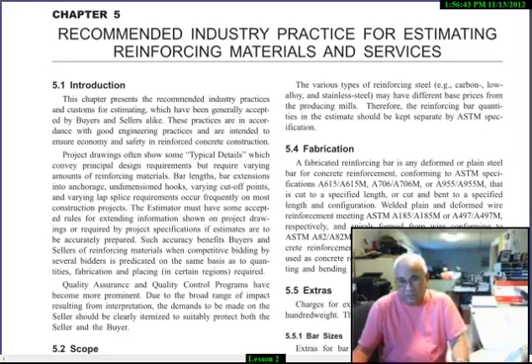In sheared lengths, that is straight bars, the total dimension is rounded up to the nearest inch only. There are no fractions allowed, only full inch. Everything is rounded to the full inch. Fabricating rebar is a costly operation. The cheapest one, of course, will be just strictly shearing of the bar, shearing of straight bars. Straight bars are the cheapest to fabricate.

Mainly, all you do is put a series of bars, several quantity, on a shear machine, shear line, and they're sheared up in one operation. So there's just one operation, shearing. So shearing is the cheapest one. The most expensive is light bending. That's where the name came from, light, which means light in production. Very light in production, because most of the bars that go into that category are all the small bars, the number 3 bars, for example.

In fact, the definition of light bending: all number 3 bars that are bent are light bending. All bars, no matter what size, used for stirrups and ties are light bending. If it's a number 8 bar, used as a stirrup or a tie in a big bridge, that's light bending.

All number 4 through number 18 which are bent at more than 6 points, more than 6 bending points, or in more than 1 plane, 2 planes instead of 1 plane, these are all light bending. Bars bent with more than 1 large radius are light bending. A combination of a large radius and other bends, that's light bending. That's the most expensive one.

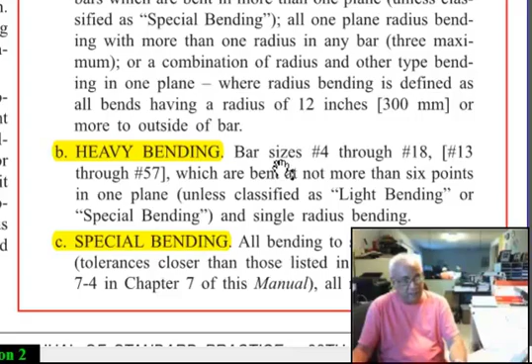On a radial fabrication machine, when you're bending a bar into a radius, there are certain limitations on the fabrication. Bars have a tendency to spring back to their original shape up to a certain radius. For example, the number 3, they say you can bend it to a radius of 5 feet. Greater than 5 feet, you might as well send it straight because it will spring back to straight. So 5 feet radius, a total length of 10 feet.

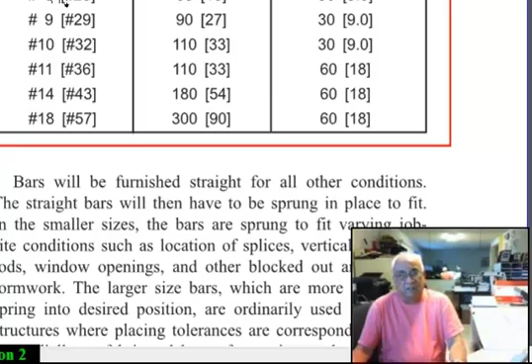And number 8, if the radius is 60 feet, you could bend it. Greater than 60 feet, you might as well send it straight. So this is what this table means. The rebar fabrication table shows the maximum radius and length of bars that will require fabrication. Beyond this table, bars are furnished straight. This is all due to the spring reaction of the bars to radius bending.

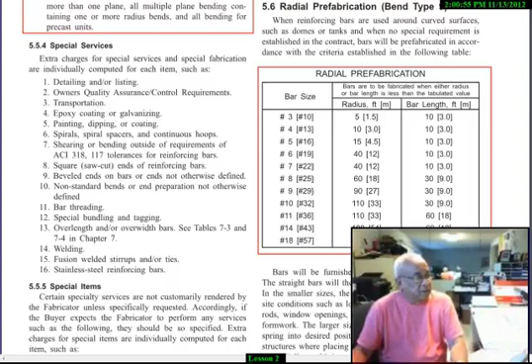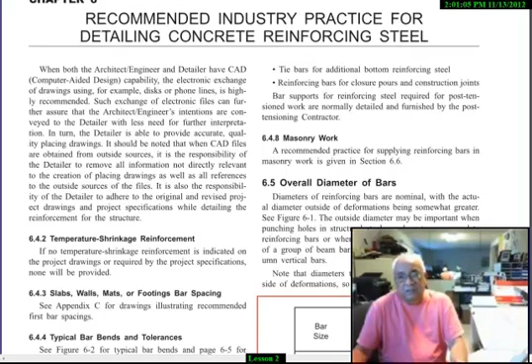Okay, now we jump to chapter 6. In chapter 6, it shows a table that shows the actual diameter of a bar, including its deformation. A detailer needs to do this. You use this in calculating clearances and spacing of bars. If you want to know certain clearances or the spacing of the bars, you use this table to calculate it.

Imperial size bars in the United States are divisible by 8. To know the diameter of the bar, all you have to do is divide it by 8, up to a certain size. For example, number 3 is 3/8 in diameter. 3 divided by 8 is 3/8. Number 4 is ½ inch bar diameter. 4 divided by 8, or ½ inch. 5 is 5/8. 6 is 3/4, because 6/8 is 3/4.

7 is 7/8 diameter. Look at this, the difference. We have number 3 and number 4. 3/8 to ½ inch, only an 1/8 difference. And then another from number 4 to number 5.

That's only an 1/8 difference, 5 to 6. We have a lot of those, so that's why we have more bars, 11 bars against metric. Metric is just 8 bars. So they have a better use of the diameter. In essence, we could eliminate maybe 3 or 4 and just jump to 3, 5, 7 on all that, but this is what we have, and this is what they use.

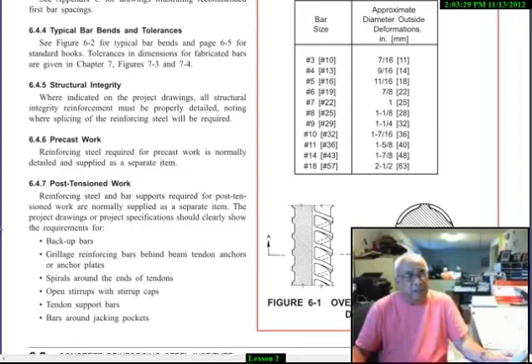You have to refer to your software, the detailing software that you use. You will notice a bar dimension A and G, always A or G. There's A or G. G, always you see A, you see G. A, and then you see G. A, you see G. A or G are standard bend dimensions. They made that specifically

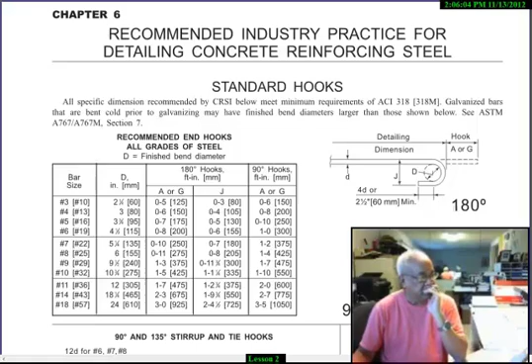Well, luckily, the software company and CRSI ACI already took this into consideration when they put up the standard bend types. So each time you use a type 1 on your computer and it's asking you for the dimensions A, B, or G, you don't need to enter from your memory what A or G is for that particular bar size you're using. All you have to do is hit a key, a designated key. In C97 it's the minus sign. If you hit a minus sign, the computer will come up with the standard A or G dimensions for that particular bar size.

So you don't need to memorize it. Because once you see A or G, you click it. But when you go to B and you click the minus sign, nothing happens because B is not a standard bend. That's any length. So the only standard bend is A or G.

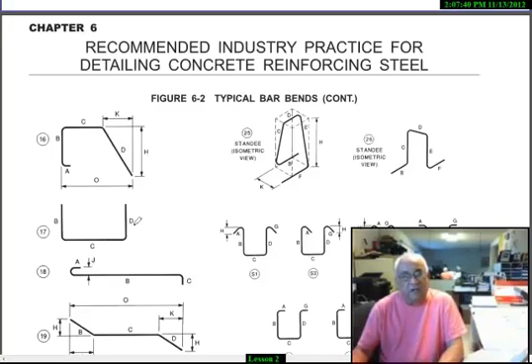And this is the reason why you use a type 2, in this case, which is a U-bar, against a type 17. A type 17 is also a U-bar, but you notice type 17 doesn't have A or G. It's B, C, D. B, C, D is not a standard, which means you have to supply that dimension. Unlike type 2, where all you have to supply is B. A or G, the computer knows. That's why A or G is designated for standard bend.

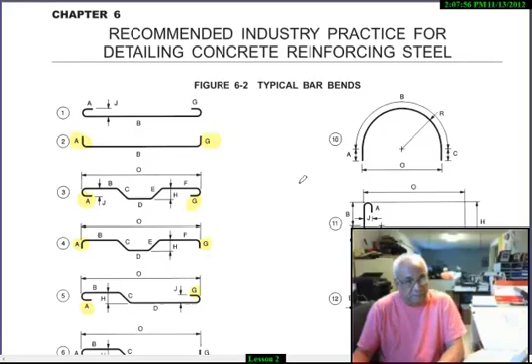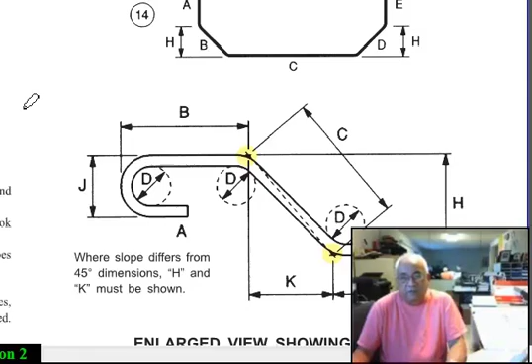The other thing on bar bend types, all the dimensions except the hooks are out to out. For example, look at this. B is out to out, out to out, one corner to the other corner. So outside this, outside that. H is out to out. Everything is out to out. You cannot be center to center. It's always out to out. That's the rule of the jungle in rebar detailing.

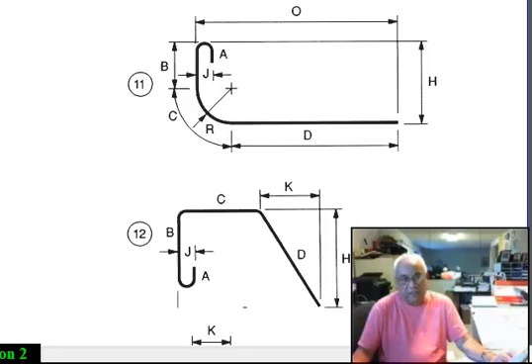H and O are never added, like H and O. They're never added to the length, because H and O are outside, they are external dimensions only and not added to the determined length.

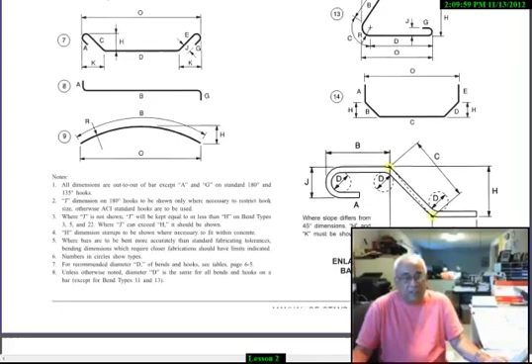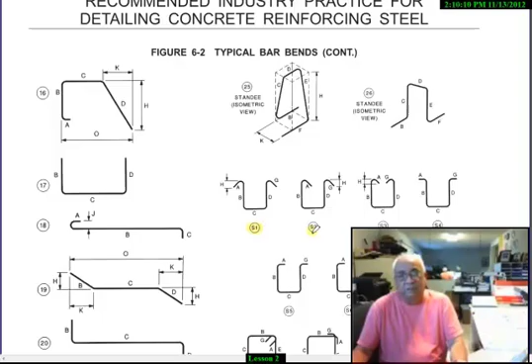Numbered types bend 1, 2, 3, 6 are mostly heavy bent bars, while S and T types, like S1, S2, T, are light bend bars. So by selecting the type, it determines whether the bar is heavy or light, so that when they price the order, they will know what price unit to use. If you use the wrong type, they will be lost in their pricing. They won't know the actual price to use.

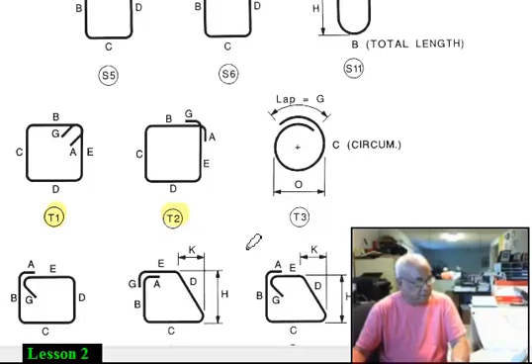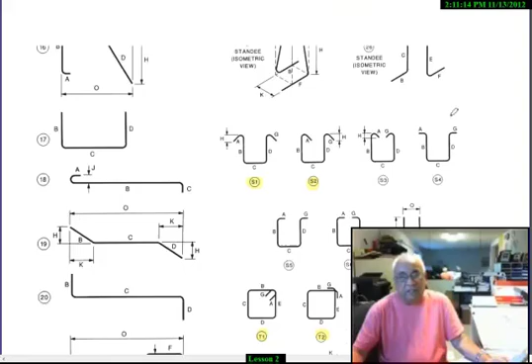Let's see, one example I can show you. Look at S11, it's a U bar. And now let's look at 10, it's also a U bar. Which one are you going to use? If you use 10, then it's a heavy bend bar.

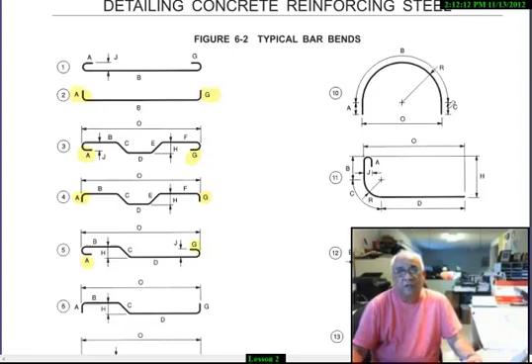The pricing on publication is almost like this: straight bars are priced $5 per hundredweight, or for every 100 pounds they charge $5. Light bending is like $15, three times as much. Heavy bending is only $10. So 5, 15, and 10. So if you have a type that's a U bar and you use type 10, they will price the order as heavy bend. But supposing that U bar is going to be used as a stirrup, like S1, you should have used S1.

That way the weight will be multiplied to a light bending price, which is $15 per hundredweight. See, the wrong use of type will throw off the pricing of the material. So the detailers are obligated to know exactly which type to use, heavy bending or light bending. That's how important it is. It's not just to the estimator, but also to a rebar detailer. And if you're creating your own special type, you have to know whether that special type is heavy or light.

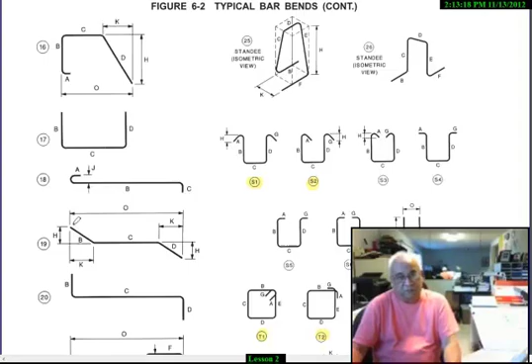The other rule in rebar detailing types is that you don't have to use all the members of the type. For example, if I need a right angle bar with just one right angle, I can use type 17, and I will just enter B and C. No entry on D means it's just an L bar, not a U bar. But if I had an entry on D, then they know. So the rule is you don't need to use all the members.

For example, you could use this for B, C, D only, without the A or G. Like B, C, D. But now you got a problem: you have two types you could use, because all you need is BCD. BCD here, BCD here. In fact, BCD here and here, they're all the same. So in essence, if you only need BCD, you could use type 3, type 4, type 5, or type 6, because all that shape is available in all those types.

But there is a rule. Remember, all these missing dimensions are in the computer. When you task the computer to make the calculation, the more numbers it crunches, the slower it gets. So it behooves you to give the computer the least amount of dimensions to crunch. So if all you need is BCD, choose the type that has the least number of members to delete. For example, between type 3 and type 5 where all you need is BCD, use 5, because there you only have B, C, D and you're just eliminating A or G. Meanwhile on 3 you're eliminating A, and you need E, F, and G.

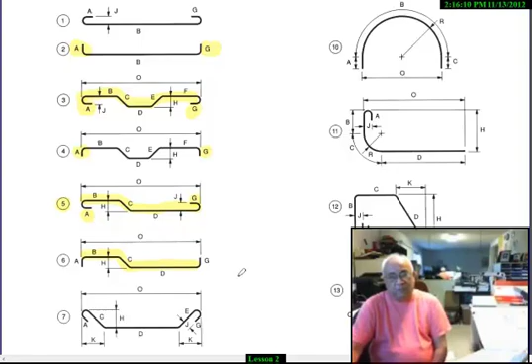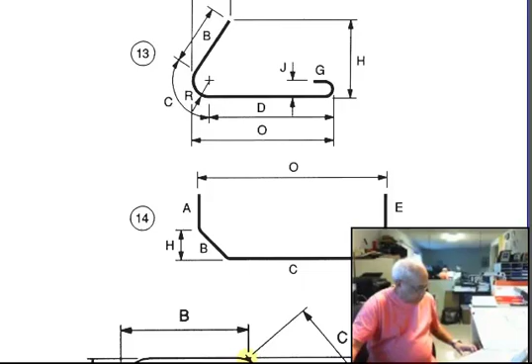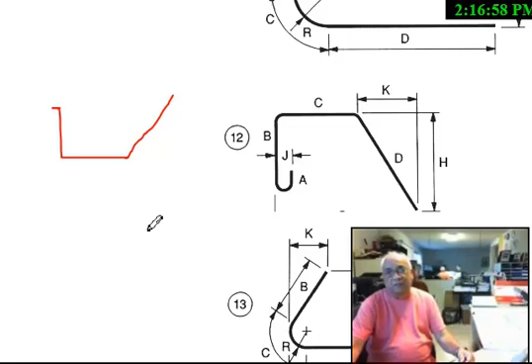Okay, the other thing is, when you're detailing types, sometimes I find detailers having a hard time looking for a type because the shape they're looking at doesn't really match the type. For example, I have a guy who had a hard time finding a type for a bar that looks like this. He had a problem with something like that because it looks like that. He didn't realize that if he flipped it over, it will look like this. So all the time, type 12 was staring him in the eye, but he could not use 12 because it didn't appear like this one.

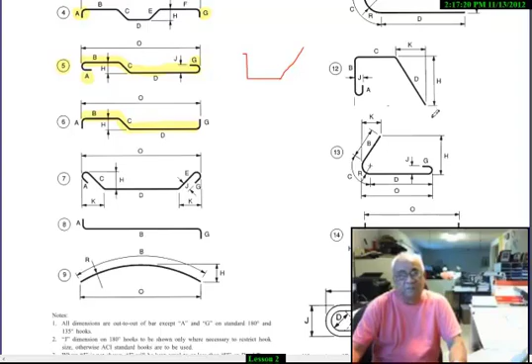Here's another problem. When you give a dimension, for example, like this C and D, right? Let's pick another one. It's real critical, and we're going to go into the detail of all these types and bending later on when we're actually detailing. Sometimes a detailer will give me a type that looks like this, and I'll try to draw it in scale.

As straight as I can, like that. He will give me B and C, and then he'll give me the H dimension, like this one. So he gives me 2 feet for this, 10 feet for this, and he'll say this is 7 and say 8 feet.

That is wrong. The reason it's wrong is because consider yourself the bender in the shop. You're given a bar that's 12 foot long, bend 2 foot 45 degree and 10 feet, and the dimensions you got is this one. In other words, you're going to keep this steady while you're bending this 10 foot bar from a straight, bending it to an 8 foot height. That is the wrong way to detail it.

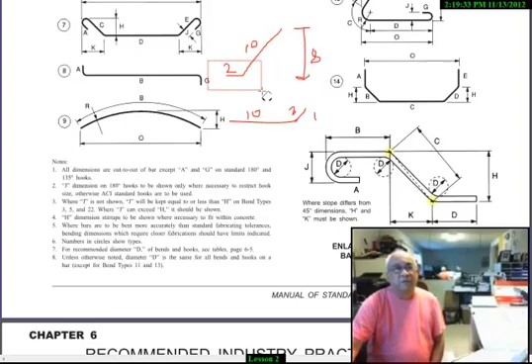Here, your table might be, the funny thing about this one is your table might just be this big. Can you imagine? You're holding that on a table, 2 feet, and outside the table is sticking out 8 feet. Well, here it's better because you're holding a bigger piece on the table and bending. So in this case, on this next one, the whole thing could be in your table, like that.

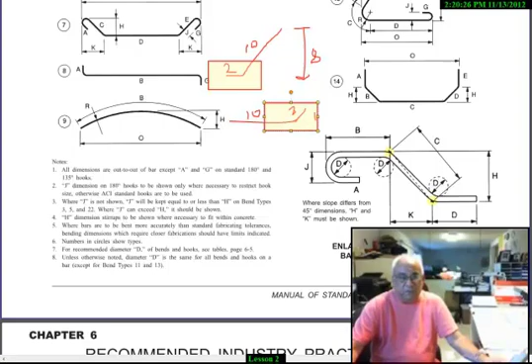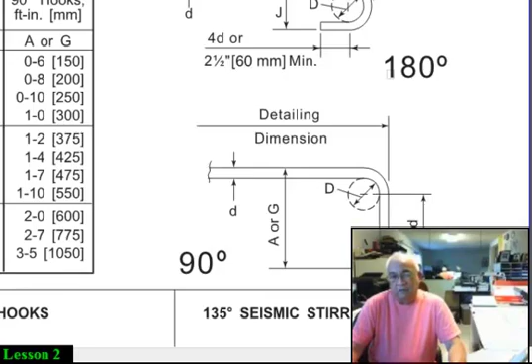Does that make sense? Okay, so that's all the thing about bend types. And I want you to read all the thing yourself and learn a little bit more, but I think I touched on what is the most important thing. Remember, you don't need to memorize all this, but it's nice to know it also. Mostly about detailer, because before, when we were detailing, there was no computer. We're obligated to memorize all this, and we all have that in memory already. Up to now, I could still tell you what the bend dimensions are. And if I don't remember, this is not like a school where you can cheat, you know, you can open your book and look at it.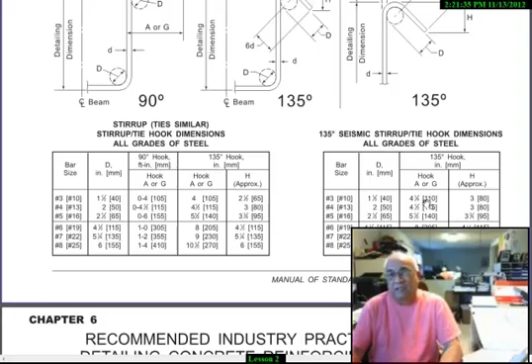But I want you to look at this special thing. In seismic zone, when you're detailing for moment frame design or seismic design, there is a requirement in seismic for 135 degree hook, like this is also 135 degree hook. Number 3 bars on 135 degree hook is only 4 inch on a standard stirrup or ties. But when the number 3 bars is used for seismic, it's 4 1/4.

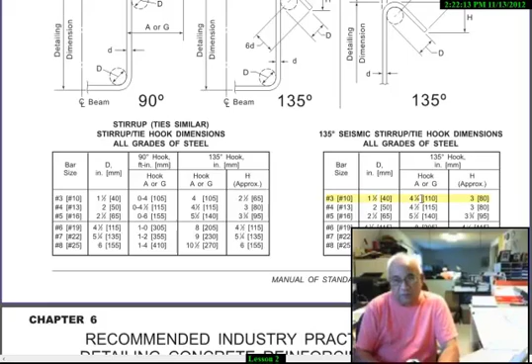So the number 3 bar is the one that is different. After that, everything is the same. So number 4 is 4 1/2, this is 4 1/2, 5 1/2, 5 1/2, 8, 8, 9, 9, 10 1/2. But the number 3 on seismic is 4 1/4, not 4. So if you have 5,000 stirrups and you detail it incorrectly, you use 4, they won't be able to use it because the requirement is 4 1/4. So you need to know and understand that there is this thing called seismic stirrup.

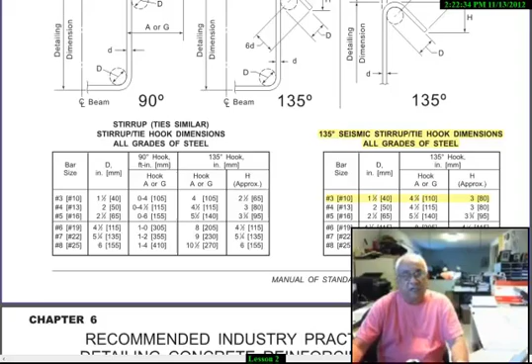All right, so read again. There's so many things. What is the mill stock length? How long are bars available? What are the length of the bars?

In the United States, bars are available in 60-foot mill stock lengths. That's how it comes out from the mill, 60 foot long, almost throughout the United States. In California, though, you could order them up to 80 foot long. Why is that? Why does California have 80 and the rest of the country only have 60?

Let me see if I could explain this. California designed most of their bridges in reinforced concrete because we don't have snow like they do in the East Coast. In the East Coast, most of the bridges are structural steel. California is reinforced concrete. In fact, California is the pioneer in reinforced concrete bridges. All their bridges are in concrete. Because of this, bridges are normally long span, greater than 60 foot span.

80 foot is common. So California started asking for 80 foot bars. And because there's a lot of bridges being designed in California, the mill accommodated California and made 80 foot available, only in California. If you go to New York and ask for 80, they tell you we don't have it, we can order one from California, but the cost of trucking from California to New York might be too expensive. That's what mill stock length is.

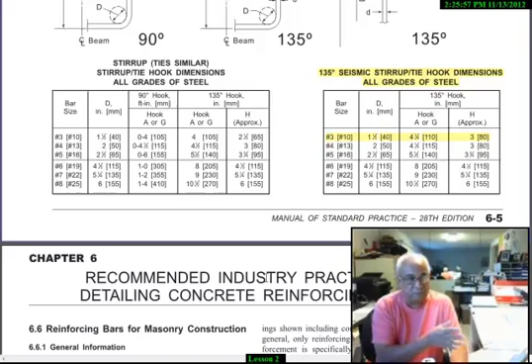So when you're detailing, do not use stock 25. There's no such thing. Do not use stock 35. There's no such thing again. Use 20, 30, and 40 because that's readily available. The shop doesn't need to cut a 60 footer, they already pick it up. They already have a 30 footer, they already have a 20, and they have a 40. So they're pre-cutting them to save time.

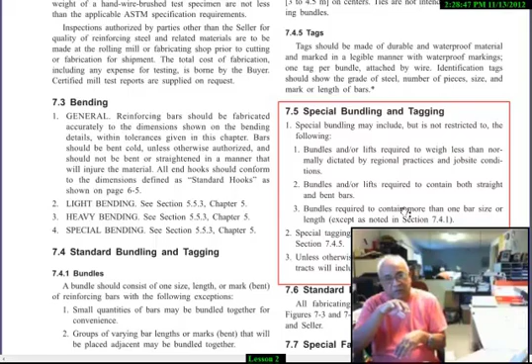If you loaded the truck in reverse, the iron worker is going to be pissed and moaning, because now he has to remove all the bars that are laid on top of what he needs, just to get to what he needs. He has to unload everything. So there's a bit of logistics when you're detailing.

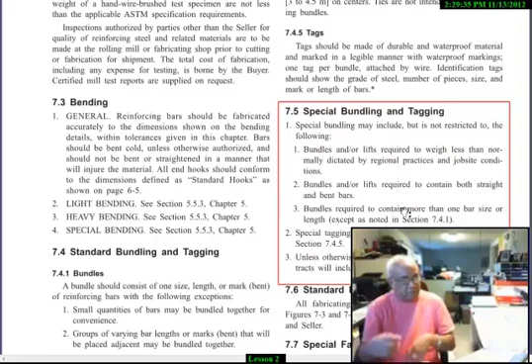And that's the beauty of detailing. Detailing is really, you have to be a genius. You're not only detailing the right size, the right amount, the right shape, but also playing with logistics, so that when it gets to the job site, the things they need first are available right away. They can unload, put that in the form, then the next one, and then the next one. That's special bundling and tagging. You will learn that.

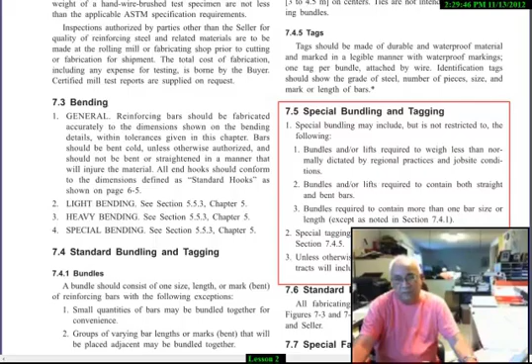And then some more - there's quite a bit of things to read. I'm just pointing out the important ones. Bars, when they're sheared, are not square. When the bars are sheared, it looks like this. When you shear a bar, it looks like that. The first sharp bite, and then the bar slides down, that's why it goes like this. So the shearing blade will hit it, go straight, and then it pushes the bar so it goes this way.

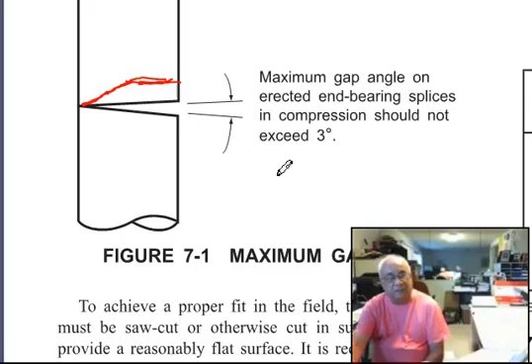Sometimes the engineer will say, I need this bar in the column to be in compression, and I need a mechanical lock, which we call a G-lock. You put it in, and you put the two bars together. Because it's in compression, it's just a simple lock, but to be effective, the end of the bar has to be squared - it has to fit exactly square. If the rebar you're detailing needs a square cut, you have to specify it, and they will saw cut it, not shear it. They will put it in a machine and saw it straight, so that the two rebar ends, flush and square, will fully engage each other in compression - not just one part of the rebar, but the entire face of the end of the rebar.

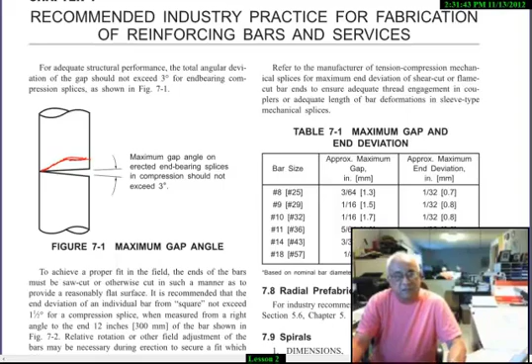See this one? The allowance is very small - maximum deviation from square to the end. That's what they're saying.

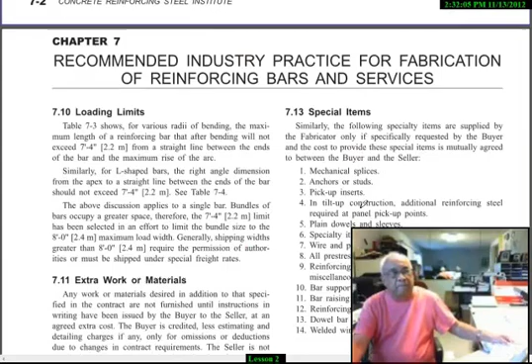Loading limits, special items, all that. Oh, also, there's a fabrication tolerance. You need to know this also.

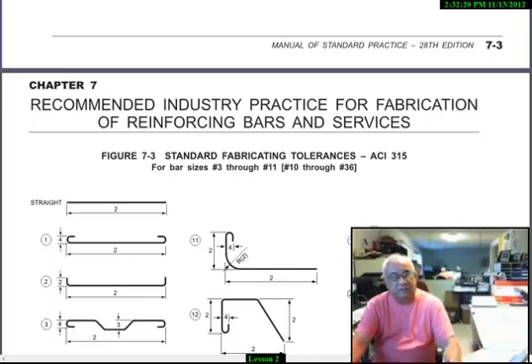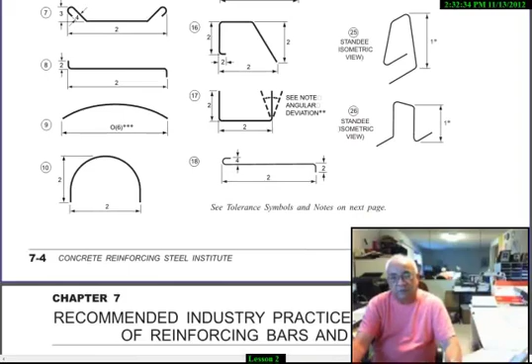These are the fabrication tolerances for a straight: tolerance number 2, number 2, number 2. What is number 2? Let's look. A tolerance number 2 denotes plus or minus 1 inch. Wow, that's quite a bit.

So which means, consider this: you're detailing something that is confined on both ends. And when you detail them, you deduct 2 inches on each side. So you came up with the concrete dimension of 10 feet. You deduct 2 inches on each side. Now you have 9'8".

But when the bar came, it's not 9'8", it's 9'9". Now you can say, hey, this is not what I detailed. I detailed 9'8". You gave me 9'9". The shopman says, well, tough luck on you, because I'm within my tolerance. My tolerance for a straight is 1 inch. So even if you say 9'8" and I gave you 9'9", you're stuck.

You know, fabrication is not a true exact science. Remember, it's a fabricating machine. There's a shopman doing it, and nothing is totally exact. That's why ACI and CRSI provided these tolerances.

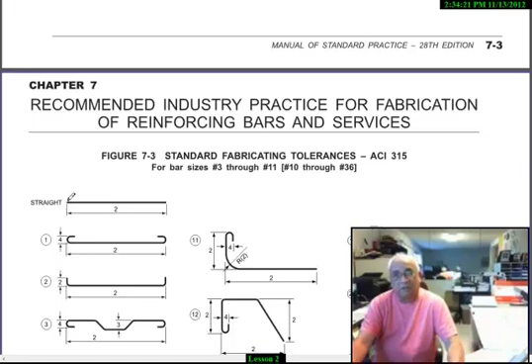Not only is there a tolerance of material, there's also a tolerance in placing. What is acceptable? What dimension is acceptable? So you tell the engineer, oh, you cannot use that because I need a 2-inch clearance. Wait a minute, mister, according to this I'm allowed to have a 1-inch tolerance. So instead of 2 inches, I now need 1.5 inches on each side. He's going to have to accept it.

Rebar in the United States is priced by the pound. Just like in the Philippines, it's priced by kilogram. In the United States, it's priced by the pound. So it's always the weight that they're concerned about.

But in fabrication, we notice that the weight is really not the factor in how they classify bending. So remember, rebar is priced by weight.

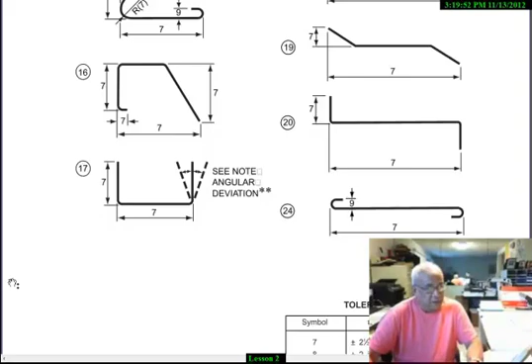The other thing we need to look at is loading limits of bar. When you detail a certain rebar, you have to consider that the bars would have to be hauled from the shop all the way to the job site. You have to take into consideration that the rebar will be laid flat on a truck bed, and it should have this maximum right angle leg for shipping.

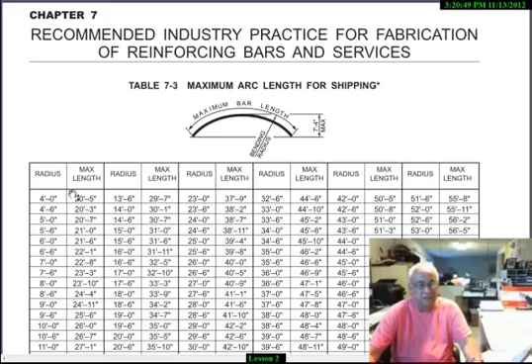Maximum arc length for shipping: so a radius bar has to have, in order for it to have a 7'4" maximum, all these dimensions. A radius of 4 feet, the maximum length is 20'5", and the radius is 13'6". So these are the tables that determine the maximum arc length. It's given here.

Sometimes though you need a bar that exceeds this maximum limit. In a case like that, the shipment will be on special shipping. The truck will be escorted by other cars to get to their destination. You have to have a special permit to haul the rebar.

On a right angle bend, these are the tables - the maximum right angle leg per shipping. So in other words, if you have a shorter leg of 8 feet, the maximum length should be 18'4", and that will give you a 7'4" max. So it gives you, on a shorter leg, what is the maximum leg. Shorter leg, maximum leg. Shorter leg, maximum leg. This is for loading limits, strictly for loading limits.

You see this problem mostly on big retaining walls, where you have a leg and a vertical height. The engineer wants it in one piece, and you tell the engineer that's not going to happen because you won't be able to ship it. You could, but you're going to have to ship it at night, with a special permit, and 2 cars escorting the big truck on each side. It's kind of an expensive proposition.

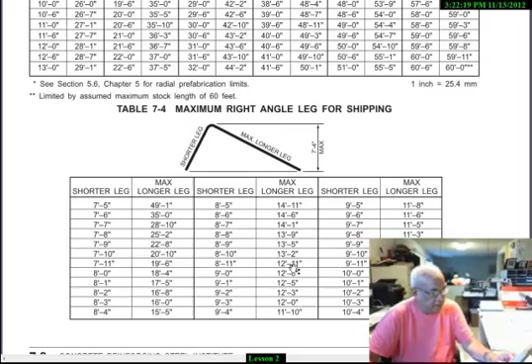Field bending - there's a limitation on field bending. Reinforcing bars should not be field bent or straightened in a manner that will reduce the strength or ductility of the bar.

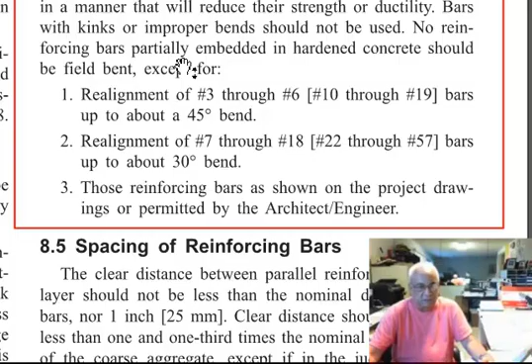But there's some requirement that could allow you to bend it. For example, realigning number 3 to number 6 - that's allowed, bars up to a 45-degree bend. So these are the rules on that. You've got to go read. You need to read all that.

Also, there's a special machine that welds, not tack weld, but fusion weld, a holding wire into a set of stirrups, so that this set of stirrups becomes bundled together, and all you have to do is lay the beam bars inside. You don't need to tie that stirrup to the bars because it's already pre-tied by these holding wires. This method allows for a quicker way of assembling beam cages or column cages.

Some of our customers have this machine, and it requires a special detailing from us. We have a video of this. Those of you who are new though don't need to be concerned about this, because out of so many customers, very few have this machine. So don't worry so much about this.

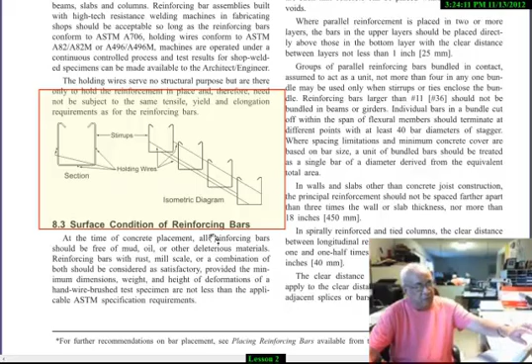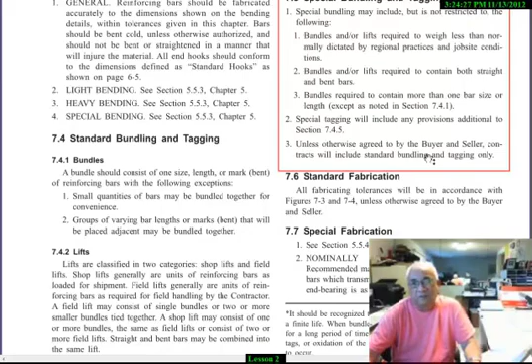Oh, I forgot to tell you on tags. If I could go back to tags. Tags come in different colors. Each fabricating shop has their color on the tags. There are 10 colors available, all matching the last number of a release. For example, release 1 or 11 is color 1, release 2 is color 2, release 3.

And let's see if I have a sample of color tags. I think what I have is from, oops, not that one, the one from Canada. If the last number of the release is 1, the color of the tag is white. Release 2 is red, release 3 is dark green, and on and on. Because it's color coded, logistically it helps the iron worker pinpoint the bars that are going to be needed. He will direct his iron workers to unload all the green bars to that side and blue bars on that side. So that helps sort out all the rebar.

This is not practiced in the Philippines, so you don't see this in the Philippines. But in the United States, this is really used, because in the United States, labor is so expensive. So the less handling, double handling on the bars, the cheaper it gets. In the Philippines, they handle, double handle, triple handle the bars. If you go to a job site in the Philippines, you see rebar scattered all over the place because they never use color tags.

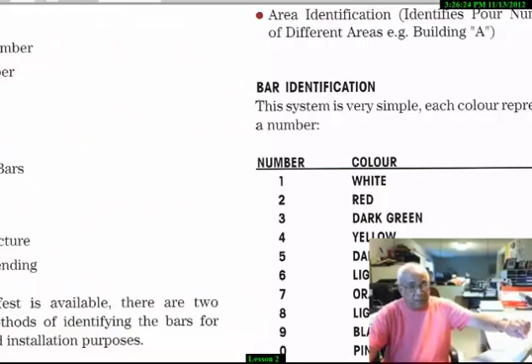We have color tags in the United States. You don't need to worry about it because it's predetermined by the release number. So release 1 and release 2 will not have the same color tags. So right away they could distinguish release 1 from release 2 by just looking at the tags. That's easy. Okay, we're getting close. Okay.

Now field bending, lap splices. We're going to talk about lap splices later. Okay, we get rid of this one. Oh, also, how many of you know that rebar does not only come in straight rods? In the Philippines, all you see of rebar are straight rods. It just comes in straight bars. In the United States and all around the world, rebar also comes in coils. The rebar is coiled.

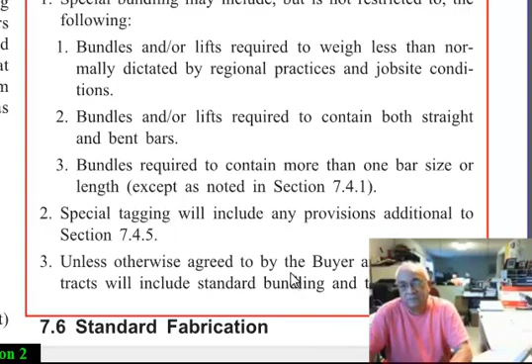Here's a sample of that. Where is that sample? There. See, the rebar is in a coil. Because it's in a coil, it has less waste, less remnants, less scrap. In the Philippines, rebar comes in 12 meters. So if you cut a length from a 12 meter, you will end up with one remnant every 12 meters. That's why there's a lot of scrap in the Philippines. For every 12 meter that you need, you cut them up, you end up with maybe half a meter or 1 meter or 1.5 meters, which very seldom you can use. So you throw it away as scrap.

Because this is in a coil, when you cut this, you will only end up with one scrap for every 3,000 feet of coil, 3,000 feet of rebar. The coils come from number 3 to number 6 bar. In Europe, it even goes higher than number 6. It's got number 7, 8, and I believe number 9 also. Europe is more advanced as far as rebar and the equipment.

The only bad thing about coils is it requires a straightener, because you cannot use it to reinforce a slab because it's a coil. But if you have a straightener, you run it through a straightener, it'll come out straight, just like a straight rod. And the coils are also deformed. It's plain or deformed. Again, it could come in number 6 bars, 3/4 inch thick. So most of the small size bars, 6 and under, are in coils. Less waste.

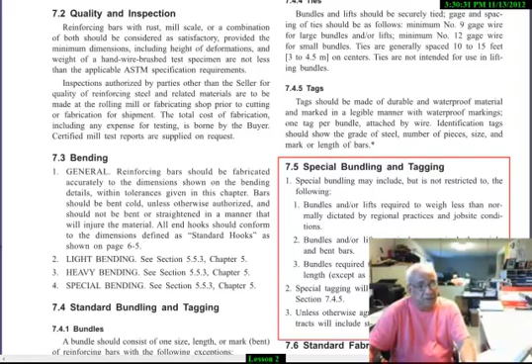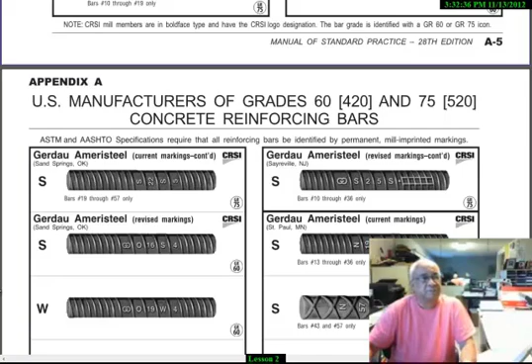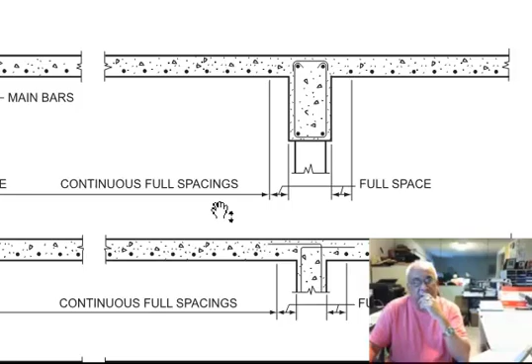Now, I want you to go to Appendix C. Read and study it. In the absence of specific design details, you will find Appendix C very helpful. This is Appendix C. In Appendix C, it tells you, absent the specific design detail, what are the rules for spacing a bar? In a slab, beam and slab, the slab rebar, given the spacing, to find out the quantity of the rebar, you start the first spacing. One full space from the face of the beam is your first bar.

And it ends one full space away from the face of the beam. Not at the face, but a full spacing. That's the rule of the jungle. If an engineer sometimes doesn't know this rule, he will say, oh, I want half a space. I say, where did you learn that? You show them this. It says, the rule of CRSI says a full space. Not half a space, but a full space.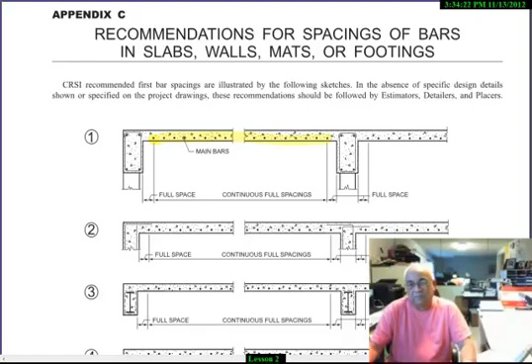So you need to know this if you want to be a good detailer. That way you're not giving an extra bar. Because the ironworker knows this. When you give him a bar, he starts a full space away. And then if you gave him a little bit more, he says, hey, you have one extra bar. Because you spaced it half a space, he spaced it full space. So it's important to know this. That's on a structural beam, full space, full space.

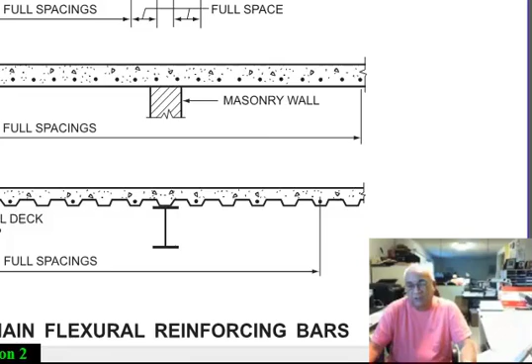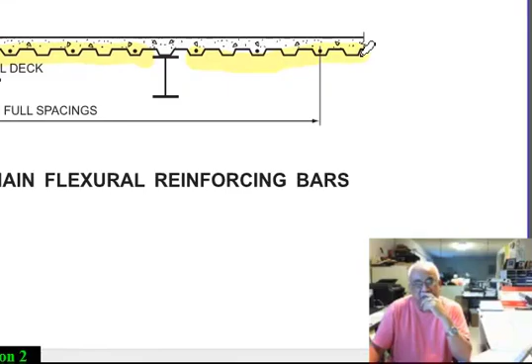Okay, now look at the difference when it's masonry. If the support is a masonry wall, you begin at the end of the concrete. You begin at the end of the concrete. There. Oops. You see there, all the way to the end. If it's a metal deck, you begin with the first flute, and you skip the flute right above the beam. That's how you determine quantity on a slab.

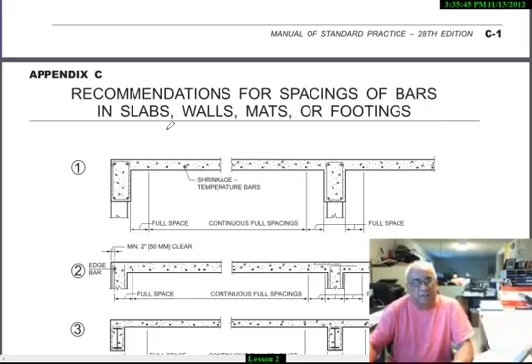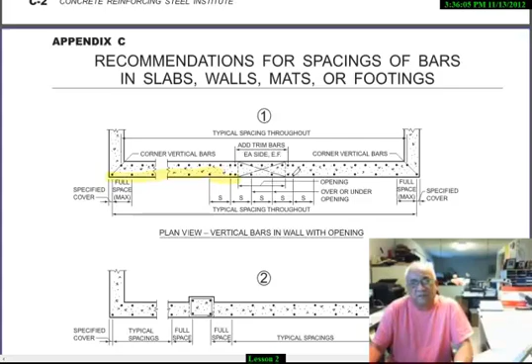This applies to slabs, walls, mats, or footings. Full space, all that. On walls, here's what happens. At the corner, you begin at the first corner of the wall, all through. If there's an opening, you stop. And inside at the corner. That's why if the wall is turning at several corners, sometimes our detailers have a tendency to say 200 bars each face when it is going into several corners. That is not so, because the inside face has less rebar than the outside face most of the time. So you really have to determine it. But it doesn't hurt though if you give them both.

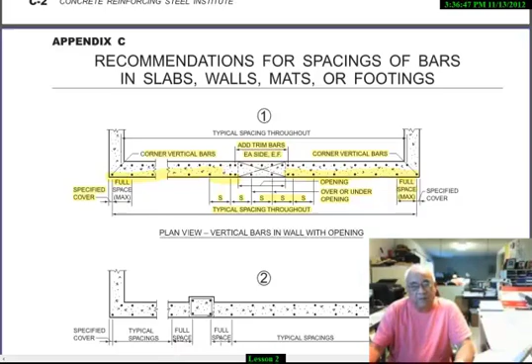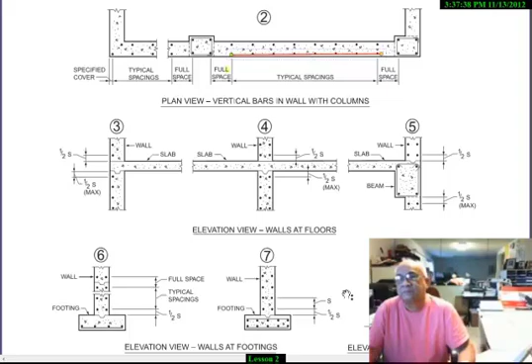If you have a column, look, one full space from the vertical bar of the column is where you begin your bar. You end the bar one full space to the vertical bar. This is a plan view of a wall. Horizontal bars on a wall, half a space at the soffit of the slab. And from top of footing, half a space. You begin the horizontal bars half a space. On precast wall panels, like tilt-up walls, you begin at specified cover, and then the spacing.

On column pads and wall footings, you begin from the side of the footing, half a spacing, and then space them. Same thing on the top, half a spacing. So if you have a 5-foot wide footing and the spacing of the bar is at 12 inches on center, you only have 5 bars, not 6 bars, only 5.

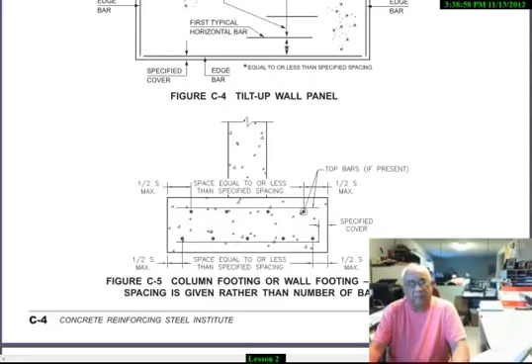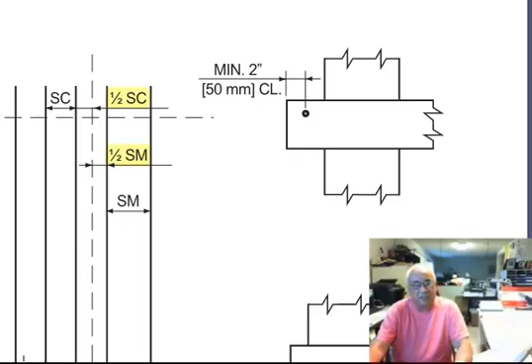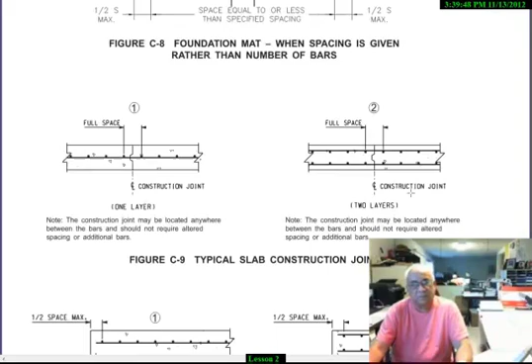In flat plate design, where you have a column strip and a middle strip, here's the center line of the column strip. You do not have a bar right on the strip. You have half a spacing on each side. These are the column strip bars, and outside this are the middle strip bars. So it's important that you know this. Column pads, mat foundation. Whenever you have a joint, full space. Half a space at the end. And on and on. This is almost the last page.

From here on, I want you guys to read through, study it, keep a copy of the MSP as your reference. I've been detailing for over 40 years, and I still keep a brand new copy of the MSP, and I always refer to it because there's no way in the world I could memorize all the rules in this book. So I always update myself by reading it from time to time. Even though I've read it so many times before, I reread it because I want to master it.

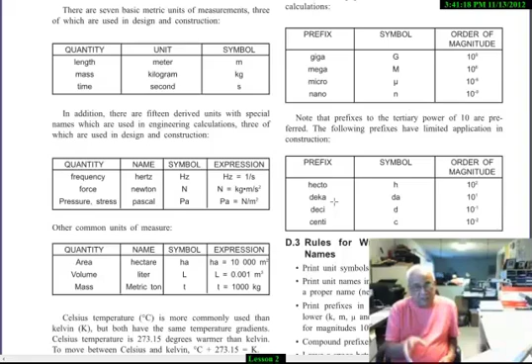All the mistakes that detailers make happen because they never really understood the Manual of Standard Practice from CRSI and ACI. This is very important. You need to master this. This is Rebar Detailing 101. Other lessons after this will deal with detailing itself and all the intricacies of detailing. But the Bible is the Manual of Standard Practice. Master this one. That's it.